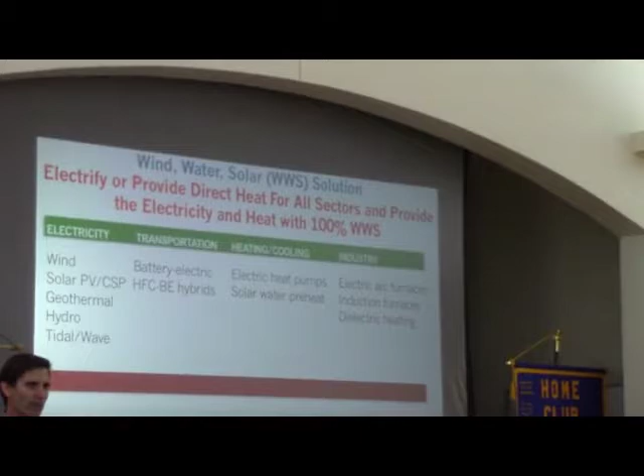So these are all drastic problems that require immediate and drastic solutions. So our idea is pretty much to electrify or provide direct heat for everything and provide that electricity and heat with 100% clean renewable energy, namely wind and water and solar power.

So just to give you examples, for transportation, we would switch to battery electric vehicles, some hydrogen fuel cell for long distance truck, ships, and planes. For heating and cooling, we use pretty much heat pumps for most everything, including refrigeration, air heating, air conditioning, any type of heating or cooling, and some solar hot water preheating.

In industry, we use electric arc furnaces, induction furnaces, dielectric heaters - these are all electric devices that exist. And we provide the electricity with just onshore and offshore wind power, concentrated solar power, photovoltaics on rooftops and in power plants, some geothermal power, tidal, some small amounts of wave power, and existing hydroelectric power.

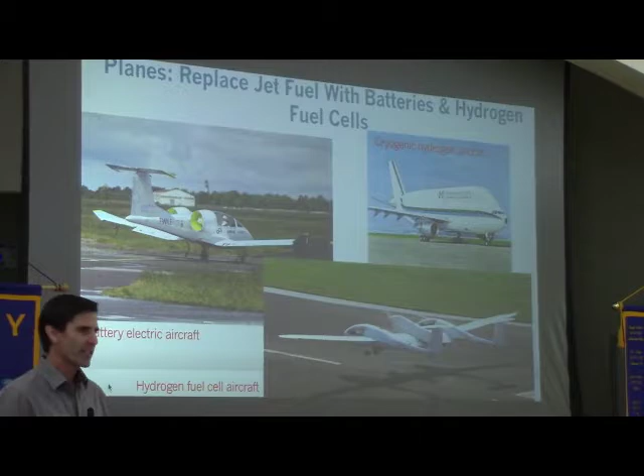So just to give you an example, things are happening so fast. There are already electric airplanes flying in the air, and here on the left is one, a small one. But it's expected that within 5 to 10 years, there will be commercial aircraft seating 50 to 100 people going 1,500 kilometers or less, just pure electric.

And then we hope the rest will be hydrogen fuel cell electric hybrids. On the bottom right is an existing hydrogen fuel cell aircraft that seats 4 people, has a range of 1,500 kilometers. And on the top right is a drawing for a hydrogen airplane.

First of all, hydrogen is an existing technology. Pretty much all rockets and the space shuttles have been lifted into space with hydrogen. But we want to use it in a fuel cell. You need a larger fuselage, but hydrogen weighs less than jet fuel, so the overall drag is similar, even if you have a larger airplane.

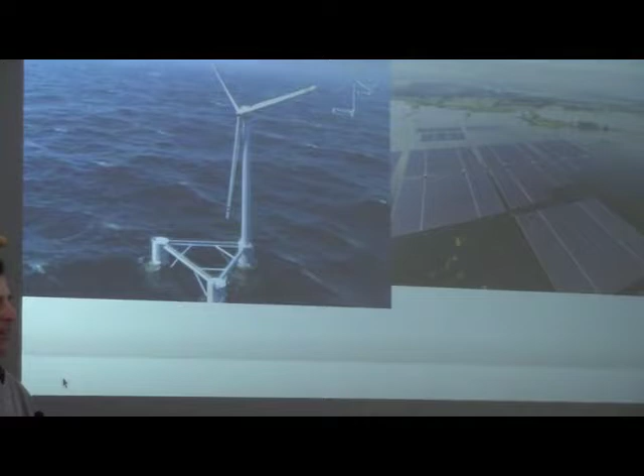And the other thing that's really taken off a lot, or starting to take off, which will really open up the ability for massive wind power, even much greater than it is today, is floating offshore wind, which now exists at the commercial scale. Several countries are producing floating offshore wind turbines, such as on the left here.

The oceans have such enormous wind potential, it's incredible. The east coast of the US could power the entire United States alone, electricity supply just with the offshore wind there. The west coast too, although the west coast is deeper, so it's much more expensive to put wind turbines that drill into the bottom of the ocean surface, which currently most wind turbines do.

So with the advent of these floating wind turbines, even the west coast offshore resources can now be used to power pretty much the whole west coast of the US and Canada as well.

And then floating offshore solar is also growing. This is especially important for places that are constrained by land, island countries too. For example, Singapore would be one, Gibraltar is another place, but in Japan they're also using floating offshore wind, solar, and in China covering lakes with it as well.

So wind and solar are just growing incredibly. In the first 2 months of 2018, 98% of all new electric power in the United States was wind and solar. And in the last 3 years, they were combined the largest source of new electric power ahead of natural gas. And the reason is because the costs have come down so significantly on the utility scale for onshore wind and for large-scale solar.

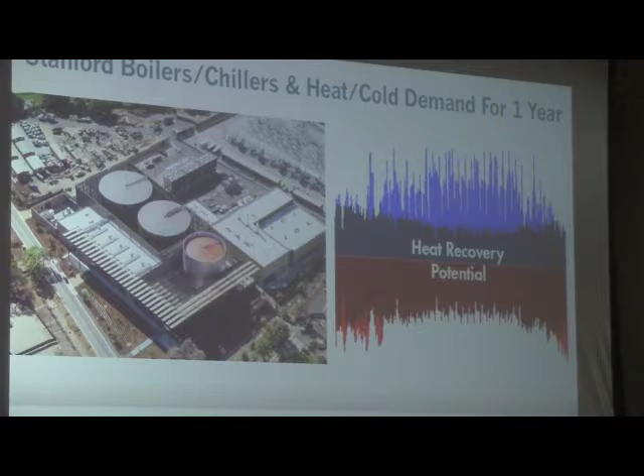One more example of storage. Stanford actually had a big natural gas cogeneration plant that would provide 80% of the electricity and heat for the university right outside my office. A couple years ago, it was bulldozed and replaced with 2 boilers and a chiller, and 50 megawatts of solar photovoltaics that they installed in the Mojave Desert.

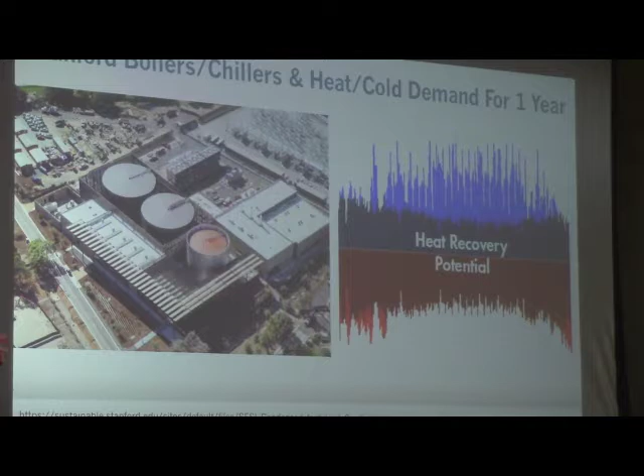What these are, the 2 boilers and a chiller, and what they determined was that at any time of the year, the university needs both hot and cold somewhere in the university. On the right, there's a diagram from January to December showing the cold demand in blue and the heat demand in red. There's greater heat demand in the winter, January, December, and greater cold demand in July and August. Whenever you produce heat, you release cold, and when you produce cold, you release heat. So instead of wasting that heat or cold, it's captured, sent to these hot water tanks and cold tanks, stored, and then shipped around the university with an elaborate piping system.

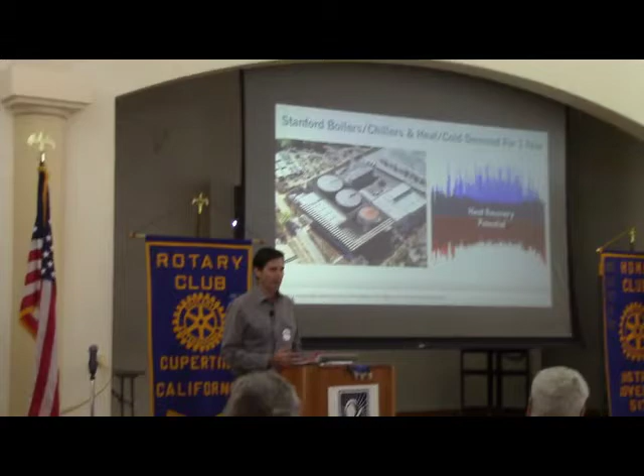So that reduced energy demand significantly, and then the remaining electricity needed, for up to 80%, is generated by solar. This is another way you don't need gas at all to solve this problem, you don't need natural gas. They just took the gas plant out and the grid's running fine on the Stanford campus.

So let me just go down to an even finer scale. I built a new home last year, and my goal was not to have any gas on the property, just run it all on electricity. I just want to show you what I did, because after 1 year, everything's working perfectly fine.

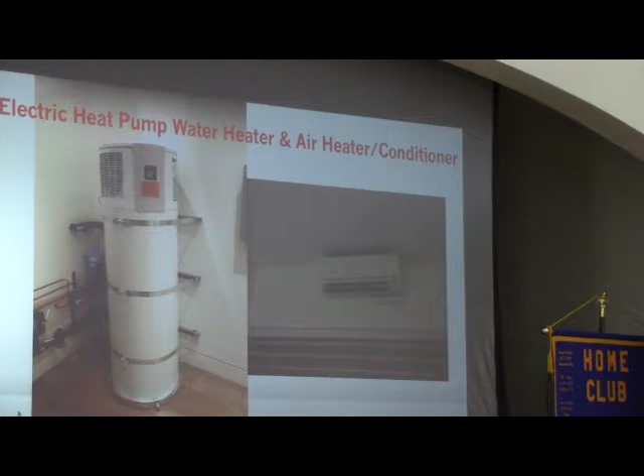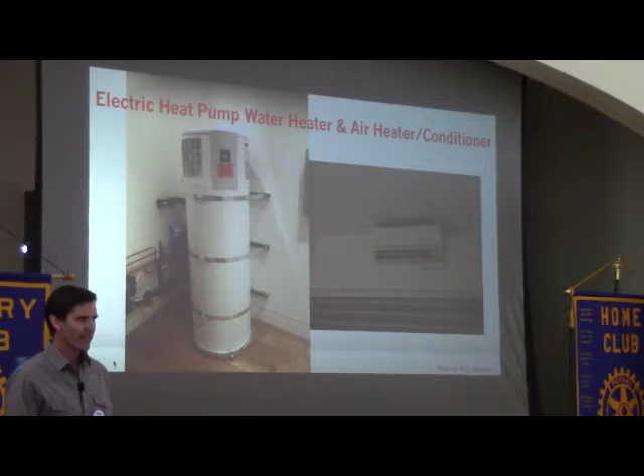For water heating, I have an air source heat pump water heater. A heat pump uses 1/4 the energy as either an electric resistance heater or a gas heater, because it doesn't create heat, it moves heat. It takes heat out of the room, it's in a mechanical room, and moves it to the water in the tank, then expels cold. So the room becomes a little cooler, but the water becomes warm, just like your gas water heater or electric resistance water heater. But it uses 1/4 the energy, so your energy just plummets.

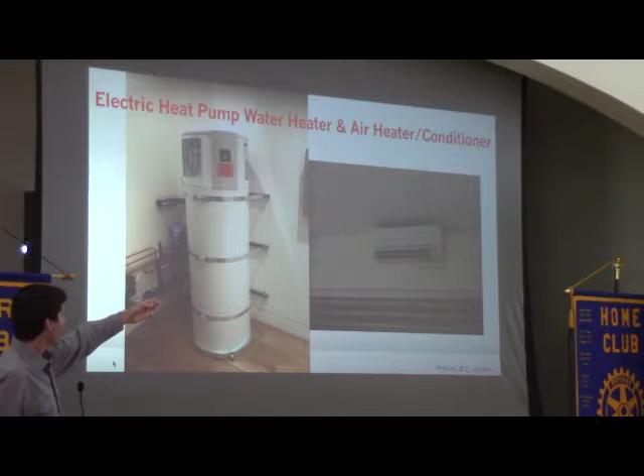And on the right, the house is heated and cooled with what's called, these are also air source heat pumps, but they're called ductless mini-split air source heat pumps, as they're also air conditioners as well as heaters. So there are no ducts. Often you'll have a central heating system and a duct system where you send the heat through the house through these big ducts, which have a lot of losses. But here there are no ducts, just copper pipes between this unit, which is on the ceiling, and an outside unit, which exchanges heat with the outside air.

So what happens is, let's say it's hot in the room and you want to run air conditioning to cool down the room, the heat just blows through this unit and over the copper pipes, which have coolant in them. The coolant absorbs the heat and sends out cold air to the remaining air, which is cold now, to the room.

That heat goes into the coolant and is sent through the copper pipe to the outside, where it's expelled to the air. So it's moving the heat from the inside to the outside, not creating heat. This uses a quarter the energy of any type of gas heater, ducted or ductless, or an electric resistance heater.

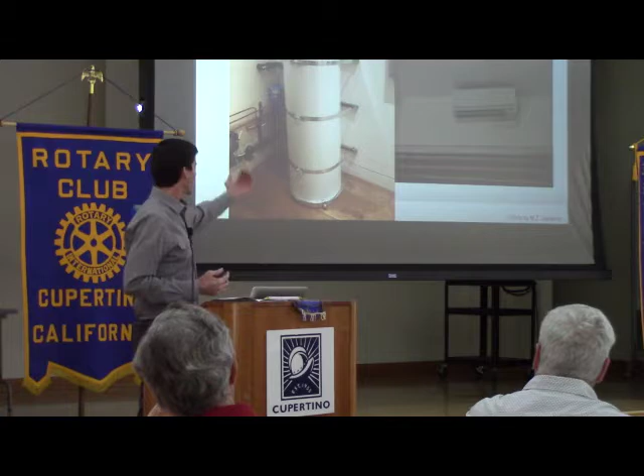Same thing with air, if you want to warm the room. You run the air over the coolant, then the coolant will absorb the cold, and you'll release heat to the room, and the cold is expelled outside.

This can also be run as what's called a ground source heat pump, where you extract the heat out of the ground or from the water. There's also a water source heat pump. Anyway, it's really efficient.

You do need special pots that have either iron or stainless steel bottoms. I bought 12 pots for $350, so it's not just any pots you would buy.

The reason it doesn't feel hot is that with a gas burner, you have something burning on the stove, and that's heating the pot. In this case, it's exciting molecules in the iron on the pot. Because the iron creates resistance, the pot itself heats up, so the stove does not heat up, only the pot heats up.

So when you take the pot off the stove, you can touch the stove and it won't feel hot—it's just the pot that's hot. In any case, it cooks just as well, and it doesn't cost any more than a regular stove.

The powering for the roof, or the energy in the home, is all powered by sunlight. There are solar collectors on the roof, and batteries in the garage. I have 4 batteries, and although PG&E only allowed me to turn on 2, it turns out that's okay because I only needed 2.

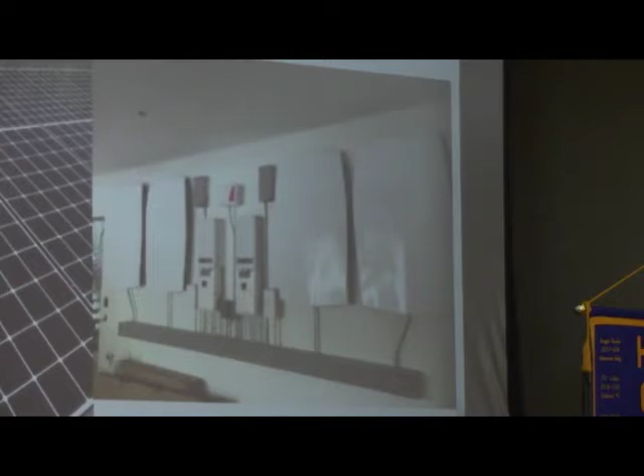If I actually turned on the other 2, I'd lose money because I'd be charging the batteries at a higher cost than I'd be using them at. So it turned out 2 is perfectly fine. I can use the other 2 in an emergency, like when all the power goes out in the neighborhood, or when the first 2 run out.

So everything is powered by these batteries and the solar, including the electric cars, which turn out to take the most electricity in the house. Let me give you an idea—I'll try to explain this chart, which shows about 1 week of usage in this house in the summertime.

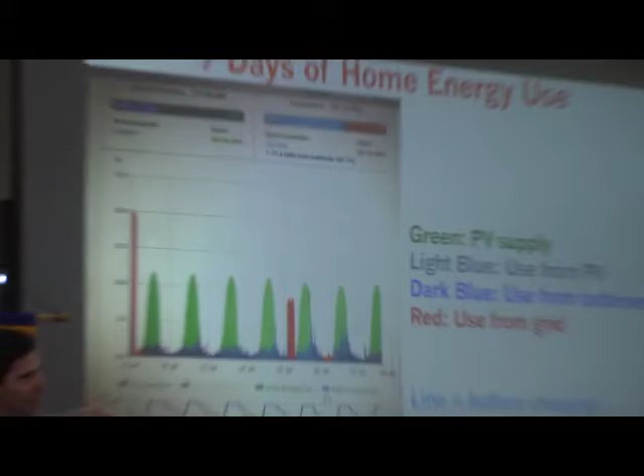The green is the production of solar electricity from solar PV. The light blue during the day is the use of electricity from photovoltaics. The dark blue is the use from batteries. What happens is, first thing in the morning, the solar powers anything needed in the house, and once that's satisfied, it fills up the battery every morning.

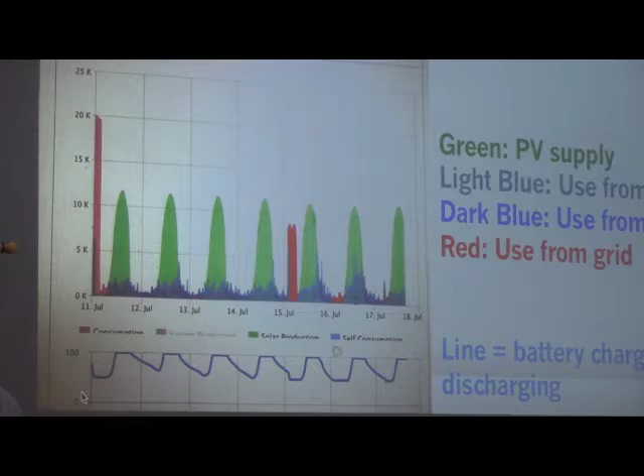During the day, the battery's not used because the solar is used directly. Only at night, when the sun goes down, does the battery kick in and start providing the remaining electricity for the house. Only when the battery runs out does the grid come in—that's the red. That really only happened this week when I was charging the cars.

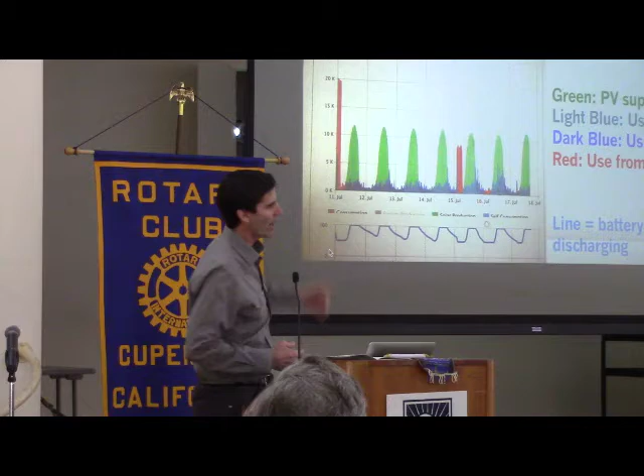One car required a 20 kilowatt charge rate, the other about 10 kilowatts. The batteries are only a total of 6.6 kilowatts with 2 of them active. All 4 batteries together would have been 13.2 kilowatts.

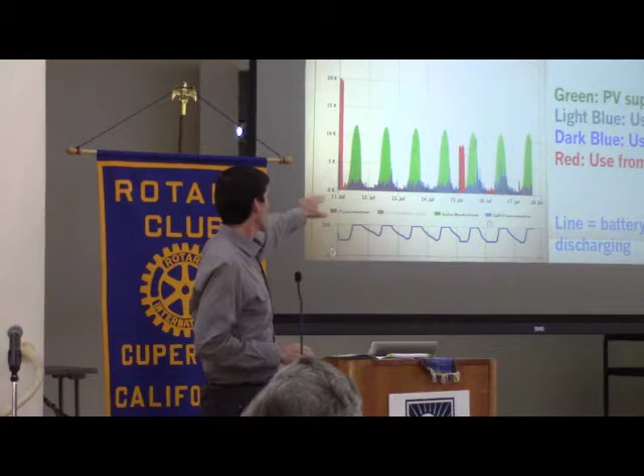But despite using some grid electricity, it turned out that even during this whole week, I actually sent 50% of my solar back to the grid.

Now most communities, including this one, can use what's called a community choice utility—in this case, Silicon Valley Clean Energy. PG&E is the underlying utility running your transmission and distribution lines, and they can also provide your power, but now you have the option of going to a community choice utility and choosing 100% renewable energy. There's one in the Peninsula, and one in Silicon Valley.

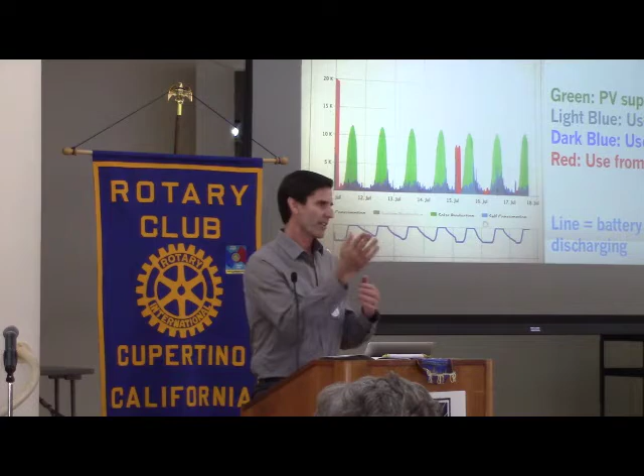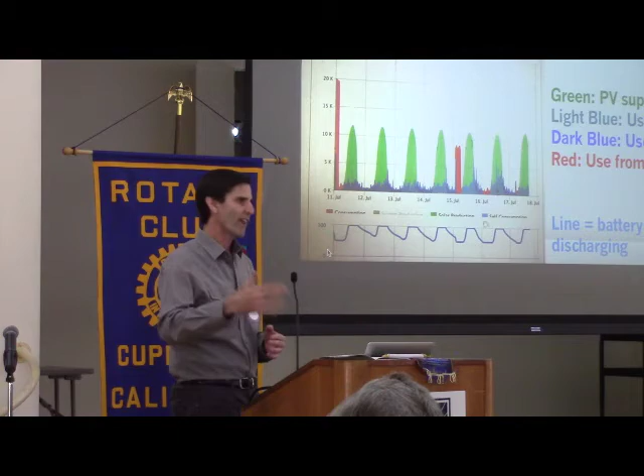In this case, I'm actually producing more power than I'm using, and with this community choice utility, they will pay much more than PG&E. If I overproduce and send electricity back to PG&E over the year, they would only pay 2 cents a kilowatt hour for the excess, regardless of what time of day you produce it. But with community choice, they pay you at time of use for the generation portion, which is up to 25 cents a kilowatt hour—that's 12 and a half times more than PG&E pays for extra electricity.

So for this past year, I generated about 20% more electricity than I used, and I'll get a check for around $700 or $800 within a couple weeks, which with PG&E would be about a $30 check.

This is good news because these community choice utilities are now everywhere, or in lots of places, especially in California. You can actually opt for 100% clean energy from these, and it's about the same cost—literally within 0.008 cents a kilowatt hour of PG&E's rates. They guarantee your energy comes from wind, solar, geothermal, or hydroelectric power. So this is good news for those of you interested in that.

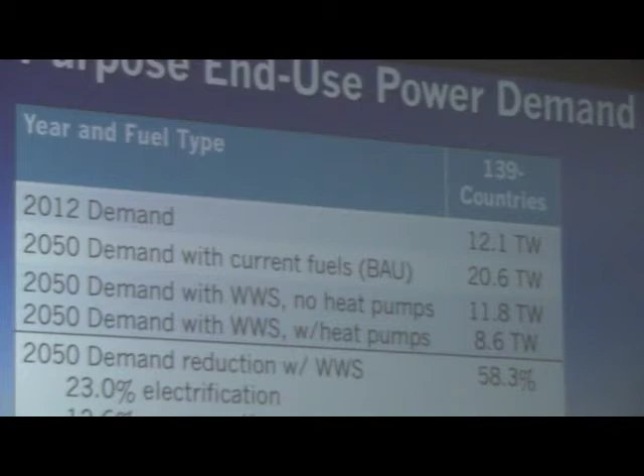Now let me move on to: can we actually power the whole world with just clean renewable energy? We developed roadmaps for 139 countries for which data were available—the ones not included were mostly small island countries and a few in Africa we didn't have data for. To summarize, the end-use power demand in 2012 across these countries was about 12.1 trillion watts, or terawatts. It's expected to rise to 20.6 terawatts by 2050.

But if we electrify everything and provide that electricity with wind, water, and solar, an interesting thing happens: power demand can go down by up to 58% without changing your habits. This is simply because electricity is more efficient than combustion—23 percentage points of that reduction come from this.

For example, in an electric car, 80 to 86% of the electricity going into the car goes to move the car, and the rest is waste heat. For a gasoline car, only 17 to 20% of the energy in the gasoline goes to move the car—the rest is just heat expelled into the car and the surrounding air. So you actually reduce power demand with an electric car by a factor of 4 to 5.

But averaged over all energy sectors, there's about a 23% efficiency improvement due to electrification.

Then you get another 13% energy reduction due to the energy used to mine, transport, and refine fossil fuels and uranium worldwide. You eliminate that energy because with a wind turbine or solar panel, the wind comes right to the turbine and the solar comes right to the panel—you don't need to go dig it up.

With heat pumps, while one heat pump reduces power demand for that energy use by 75%, heating is only a certain portion of total energy, so averaged over all energy sectors you get about a 16% reduction in power demand if you used heat pumps for everything worldwide. Then there's another 7% reduction due to end-use energy efficiency improvements beyond business as usual.

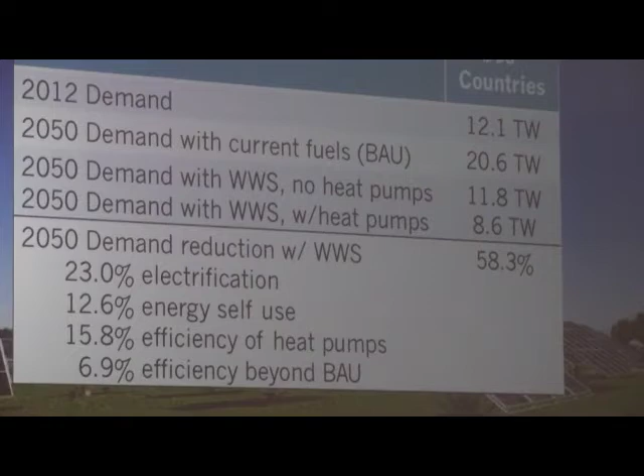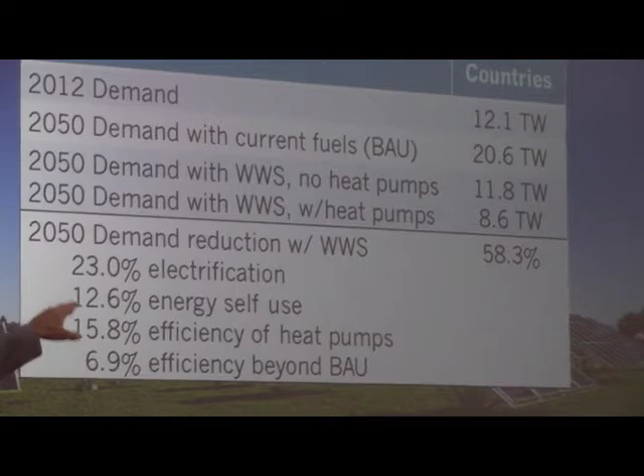So we could get from 20.6 terawatts down to 8.6 terawatts of energy demand just by electrifying everything—getting rid of gasoline and diesel cars, trucks, buses—and powering that with clean renewable energy. The next things I want to show are based on the 11.8 terawatt number, which is without heat pumps, since we did some analysis before we added heat pumps. So I'll show you how many devices you would need to power the entire world, since the 139 countries represent 99% plus of all emissions worldwide.

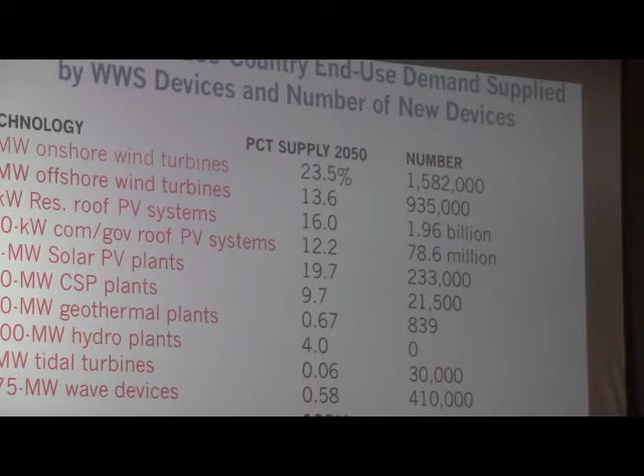To get to 11.8 terawatts, this is the number of wind turbines and solar panels you would need worldwide. It would be about 23.5% onshore wind, 13.6% offshore wind, 16% residential rooftop PV, 12% commercial and government rooftop PV, about 20% PV power plants, 10% CSP power plants, 1% geothermal, 4% hydro, and a small amount of tidal and wave. On the right is the number of devices.

There's no new hydro, that's why there's a 0 there. We just use existing hydro, and that existing hydro represents 4% of all the energy we would need in 2050. So we need about 2.5 million wind turbines.

That may sound like a lot, but think about it. In the United States alone, there are 1.7 million active oil and gas wells, and this is worldwide, plus 2.3 million inactive wells. So in the US, there are 4 million active plus inactive oil and gas wells that take up 1 to 2% of the land area of the entire United States. Compare that to just 2.5 million wind turbines worldwide.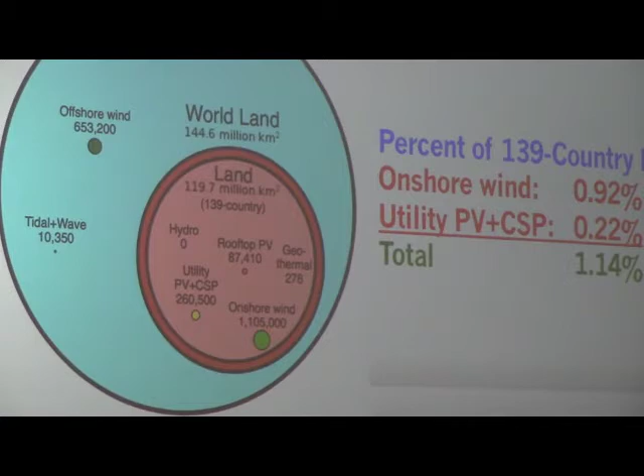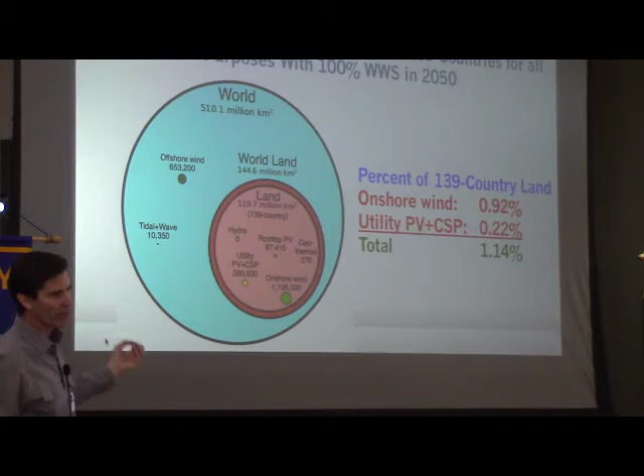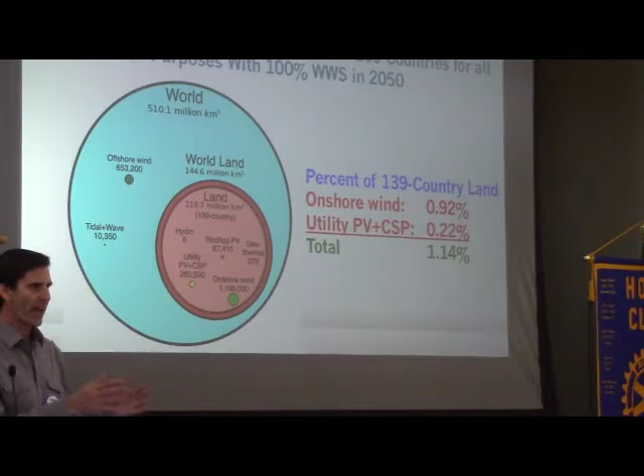The land area required for this whole thing is about 1.1% of the world's land, and most of that is spacing between wind turbines. There's zero new hydro, that doesn't take up new land. Rooftop solar doesn't take up any new land. Geothermal hardly does either. It's only utility PV and CSP, which takes up about 0.22% of the world's land, and onshore wind, which is about 0.9%, but you can use that land for open space, farmland, rangeland, cropland. So 1.1% compared to other land uses is pretty minor, and this would solve all the energy problems worldwide.

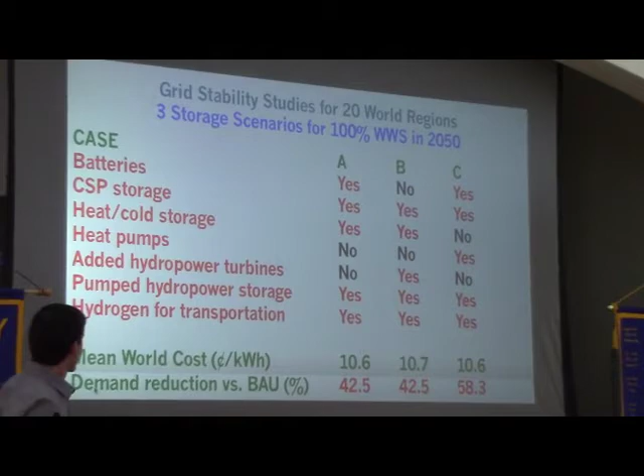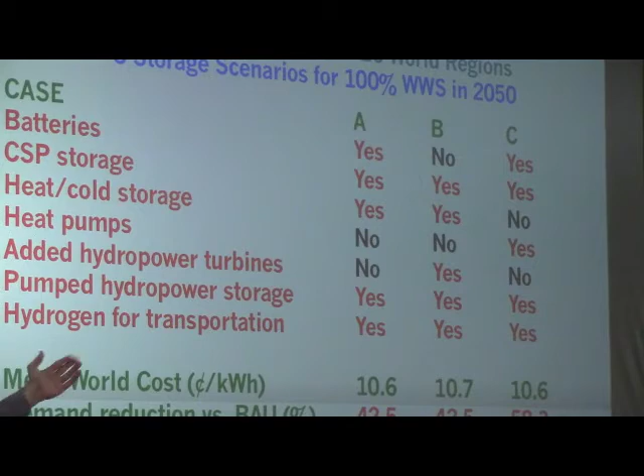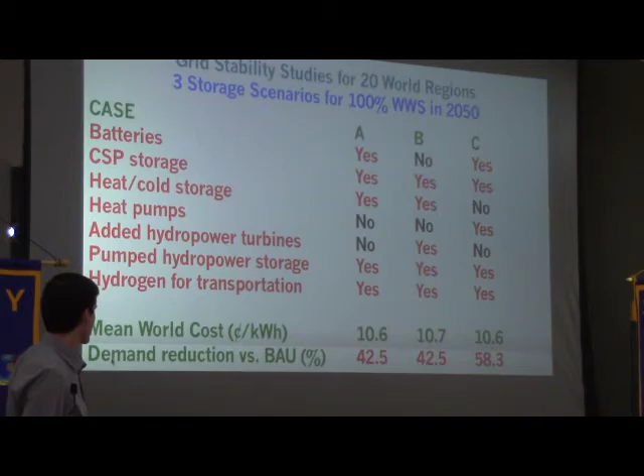I only have 5 minutes, so I'll be brief. We looked at grid stability throughout the world in 20 world regions with 3 different scenarios, A, B, and C. One was with batteries, concentrated solar power storage, heated and cold storage with no heat pumps, no additional hydropower turbines, with pumped hydro storage, and with hydrogen for transportation. Another case was the same, except no batteries, but we increased hydropower turbines on existing dams. The third case was the same as the first, except no hot or cold storage.

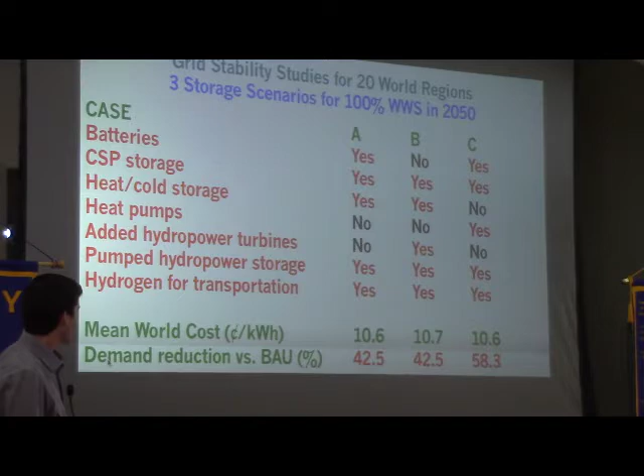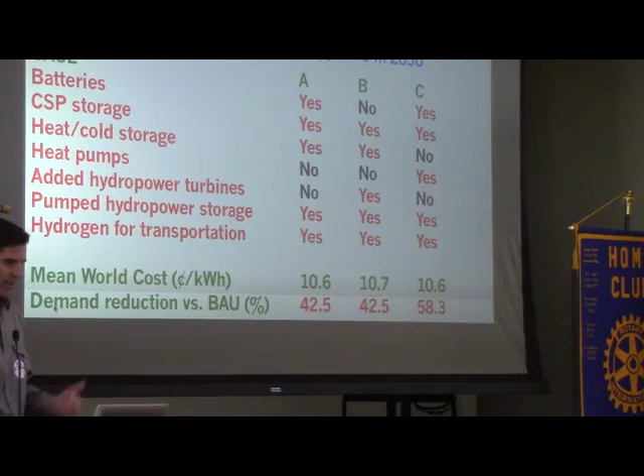We used heat pumps instead, and that was pretty much the same difference. In all cases, the cost of energy worldwide was about the same. We were able to keep the grid stable everywhere. Notice the demand reduction was between 42 to 58% because of the use of electricity and wind, water, solar.

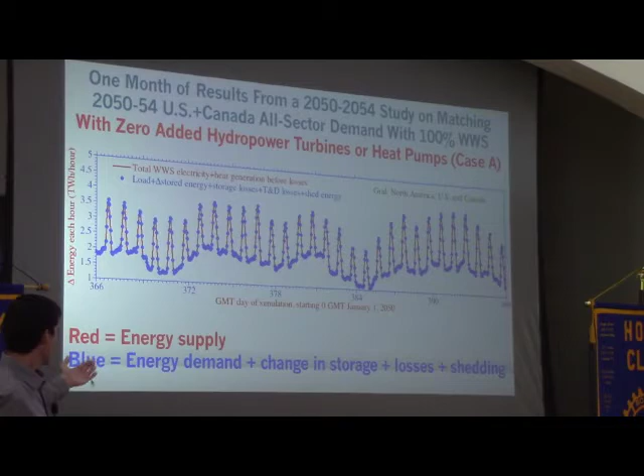The red is energy supply. The blue is demand plus changes in storage plus losses plus shedding of energy. What it shows is that the supply is matching the demand. This shows every hour, and it's matching the demand exactly.

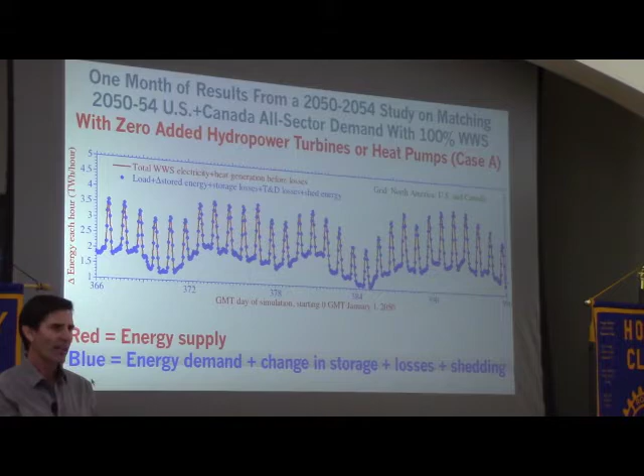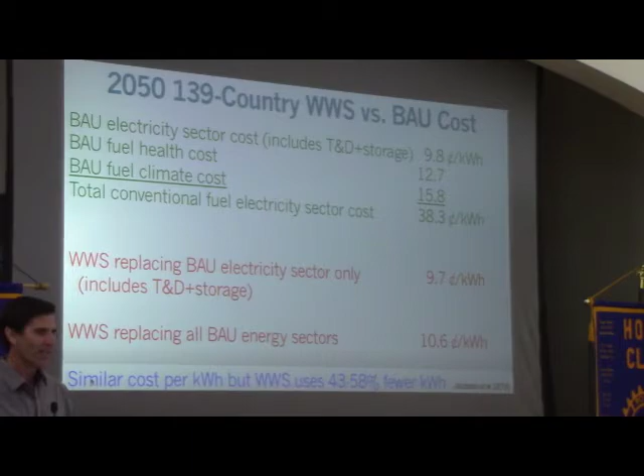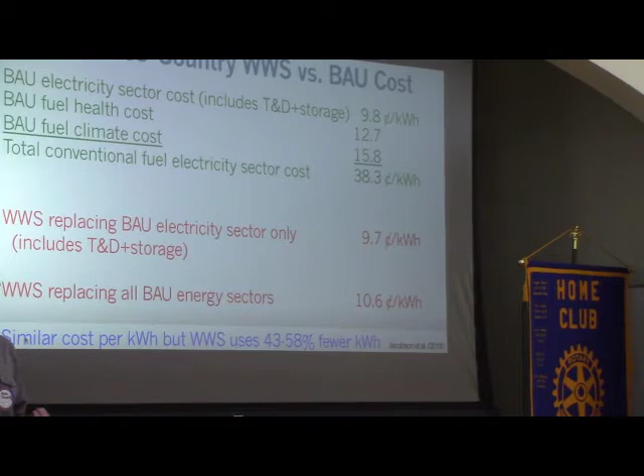The fossil fuel cost of energy in the electric power sector is about 9.8 cents a kilowatt hour. The health cost is 12.7 cents a kilowatt hour for air pollution. The climate cost is about 15.8 cents a kilowatt hour. Total, 38 cents a kilowatt hour is the social cost of energy from fossil fuels. That compares with our wind, water, solar at 9.7 cents a kilowatt hour, almost the same as the direct energy cost of fossil fuels, but with no health and climate costs.

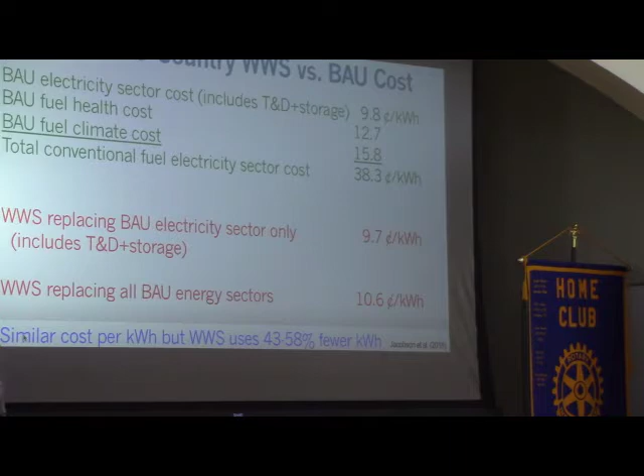So we have 1/4 the cost of energy per unit energy, but we use 50% less energy. So the consumer pays 1/8 of what they do in the current system, because if you account for the social cost, the health and climate cost, and the fact that you reduce your energy use, that's 1/8 that people are paying in society for wind, water, solar.